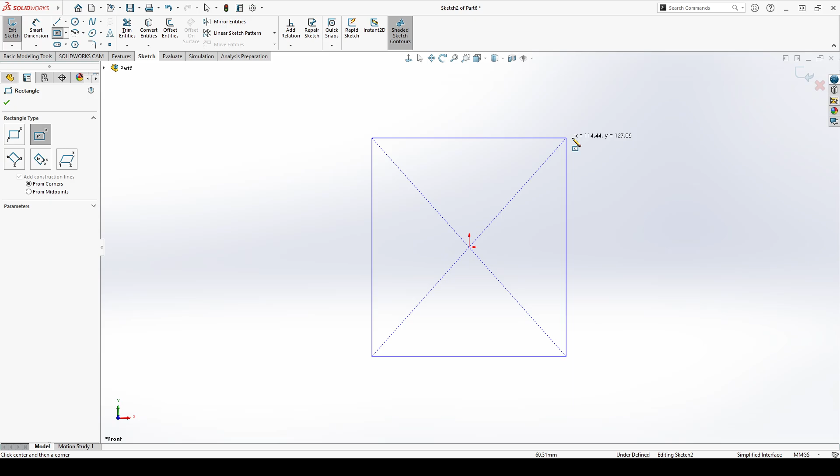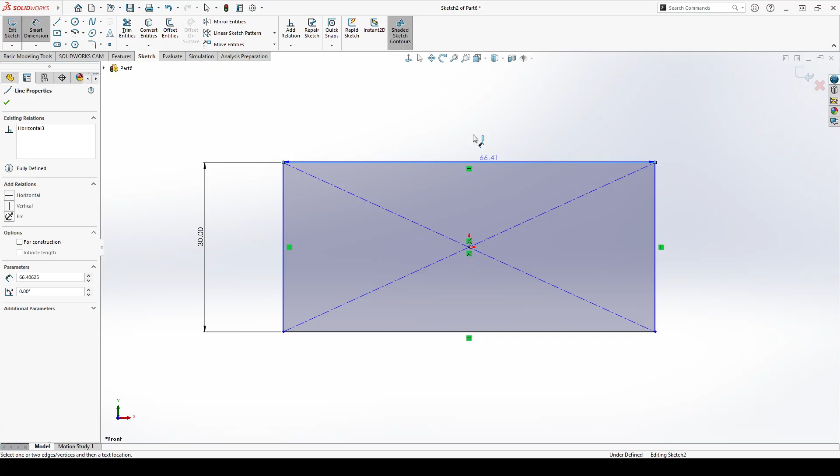We're going to make a rectangle. We can make a center rectangle actually, like so. What happens if we try to make fillets on center rectangles? We can, so we don't have to worry about it later. For now, let's fix the height and the length. That's 30, and this is 60.

That's the base pad. Now let's make these arcs, or sketch fillets on the thing. Let's give it a radius of 8. And there we go.

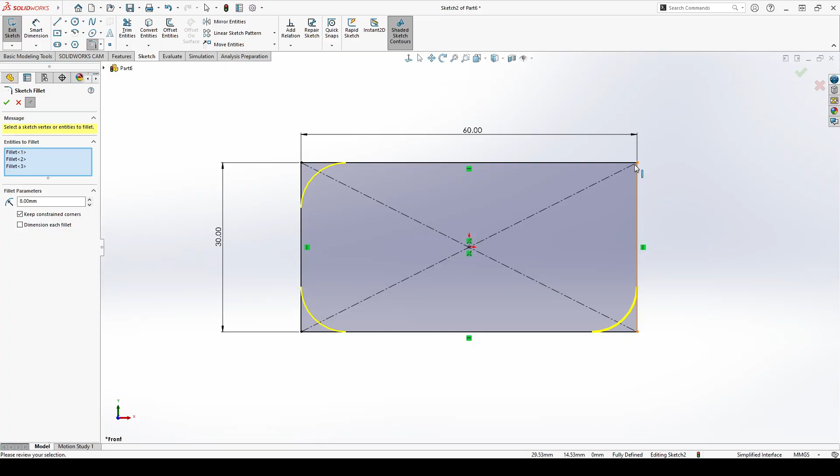Base pad is complete, we just need to pad it out now. So exit the sketch, select it, features, extrude it. It is 5 in thickness. Doesn't matter which direction, so it gives us a thickness of 5 millimeters. There we go.

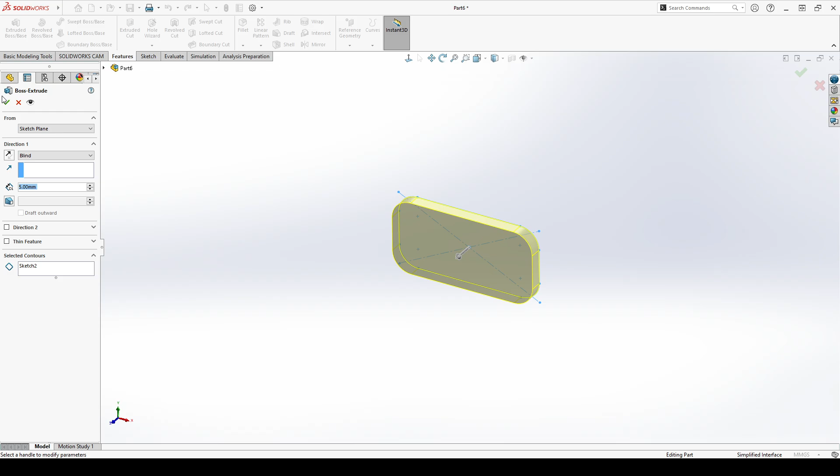So we do need the holes in this pad, so let's make that inside the pad. Once you're done with something like this, you already convert it into a feature. You can just open the sketch and modify it after, don't worry.

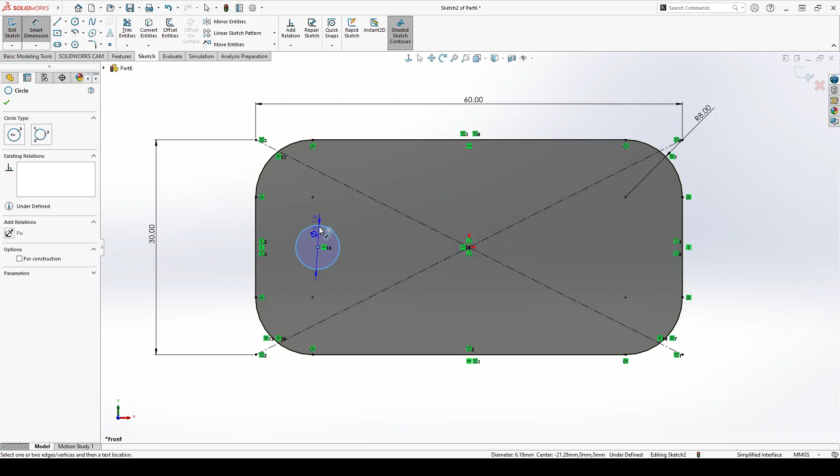So we are going to be working along the axis. Let's make this horizontal - the horizontal is the same thing as making a center line and putting on a center line. So diameter is 8, and the distance between this and the other one is 40, so the center is going to be 20.

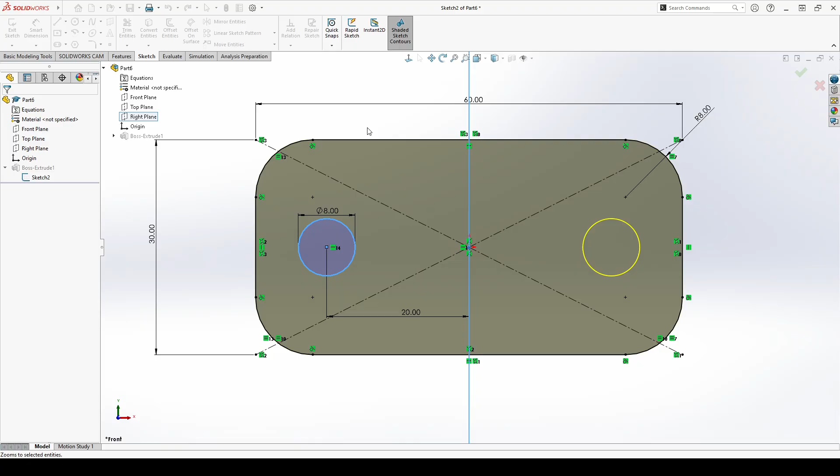Just mirror it off now. So select this and click on mirror entities. About, it's going to be a copy, so about this plane, and it's done. So exit the sketch and it'll be a hole. And there we go, the base pad is complete.

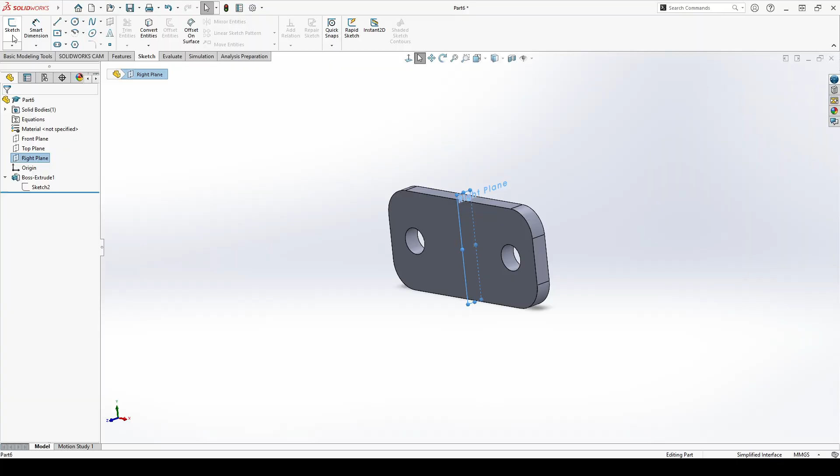Now let's start with the center thing, not the left and right pad thingies. So let's go to the right plane, which is exactly in the middle. Let's sketch here, something like so. Do we need the center lines? Well, not really. So let's go ahead and look carefully at the sketch first.

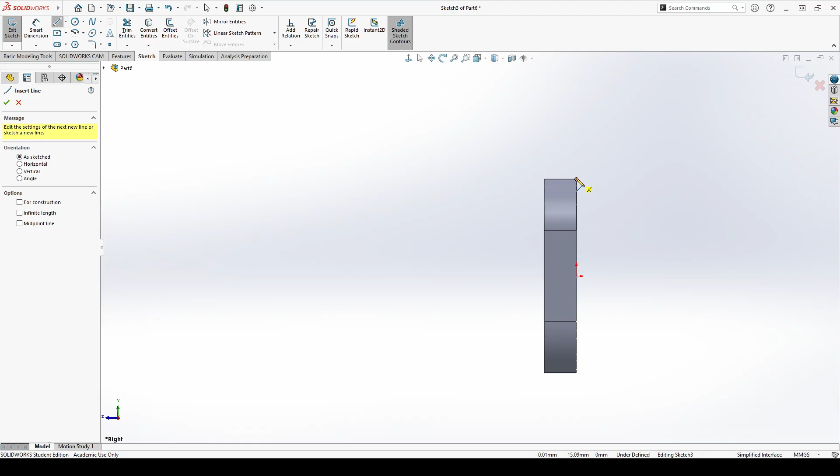I'm looking at the sketch and I can see that the top, I think, is connected to this surface's edge, not this edge, but I could be wrong, I'm not sure. Let's use this edge for now, go about making a straight line, like so. Make another line, like so, and make it parallel to this.

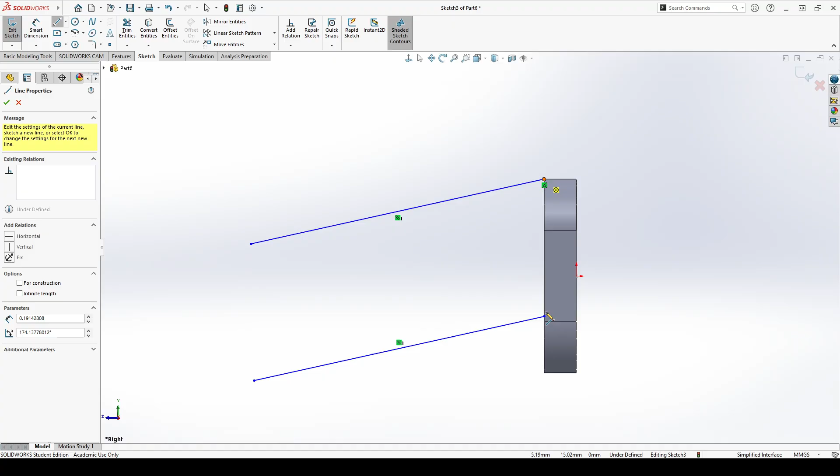This line is connected to that edge, and make it vertical, like so. So now we do need that height, right? Because we can't move it left and right. So what do we do now? We'll verify this after with the answer because I can't tell right now whether that is touching the edge or not. But either way, let's go with the assumption that it's not touching that edge, but it's touching this edge.

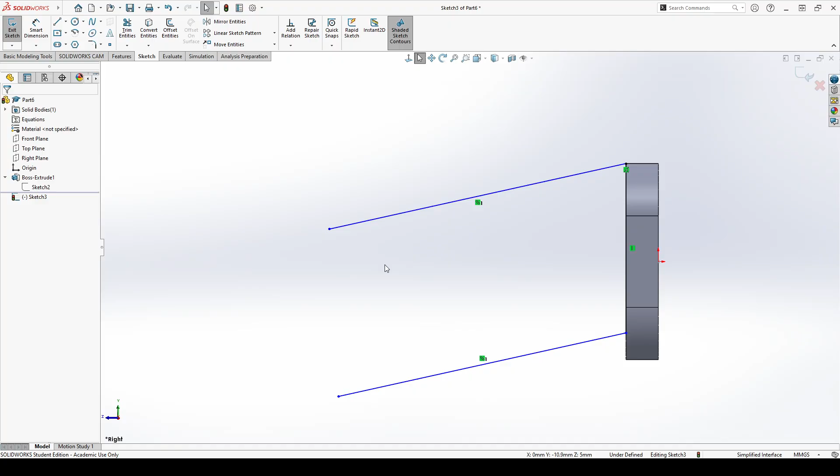So let's make our circle, which is right like that. It's tangent to that, so that's our edge, and this is also here. Wait a second, is it tangent? I don't think it's tangent to this line. Right? Oh, it's because it's parallel.

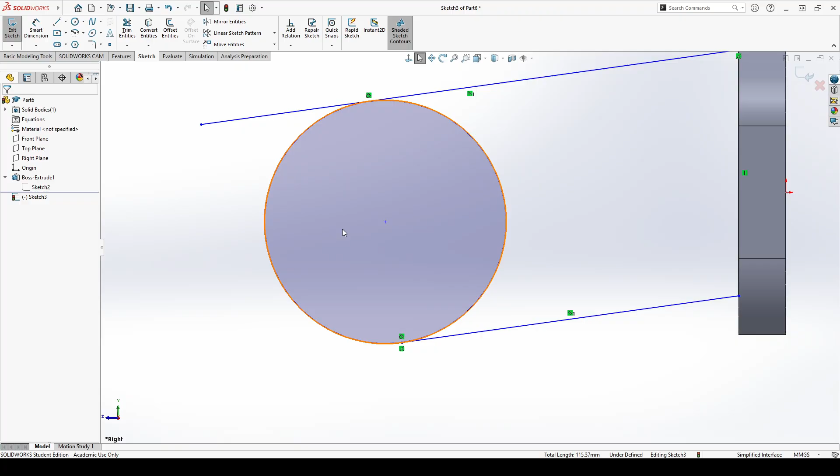Okay, so what happens if we coincide this? Nothing, right? But this is not tangent, so make this tangent. There we go. Okay, so what now? Trim this and the inner part of it, maybe? Yeah, okay, so it's complete.

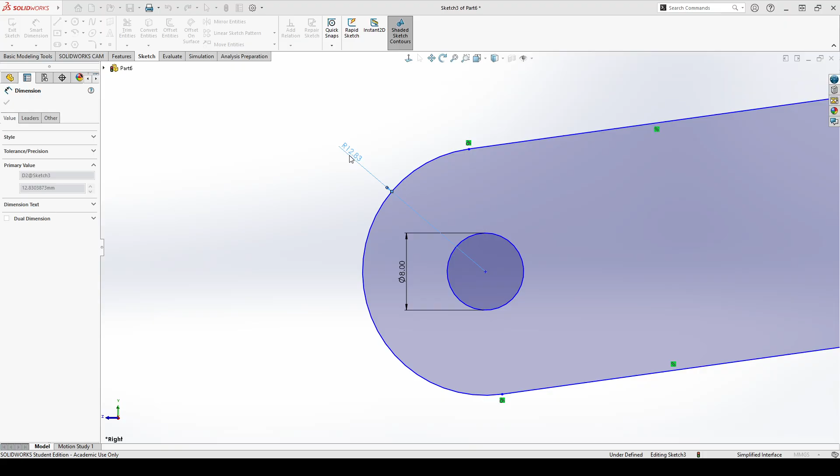And what's next is the little hole in the middle. So that is a diameter of 8, and this is a diameter of 25, so radius is 12.5. Let me just say like that.

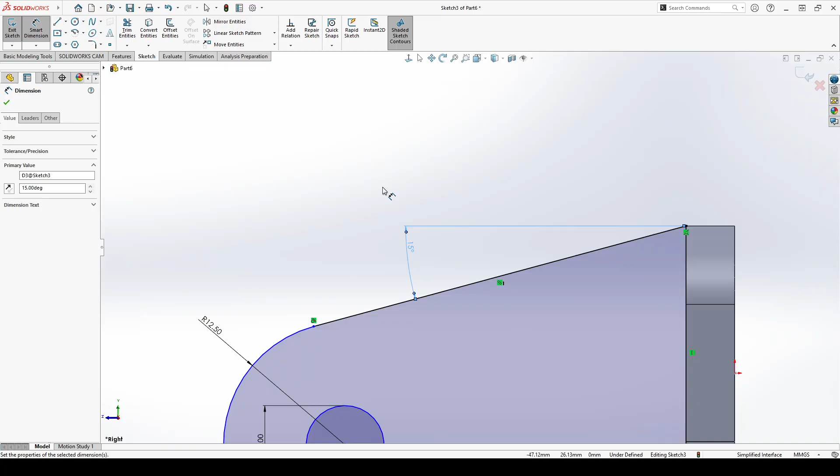Now we do need that angle to the vertical, to the horizontal I mean. So that edge to that edge is going to be 15 degrees. Okay, that's pretty slanted, more slanted than I thought. Okay, what's the next thing that we need? We need that distance from here to the origin, is 40.

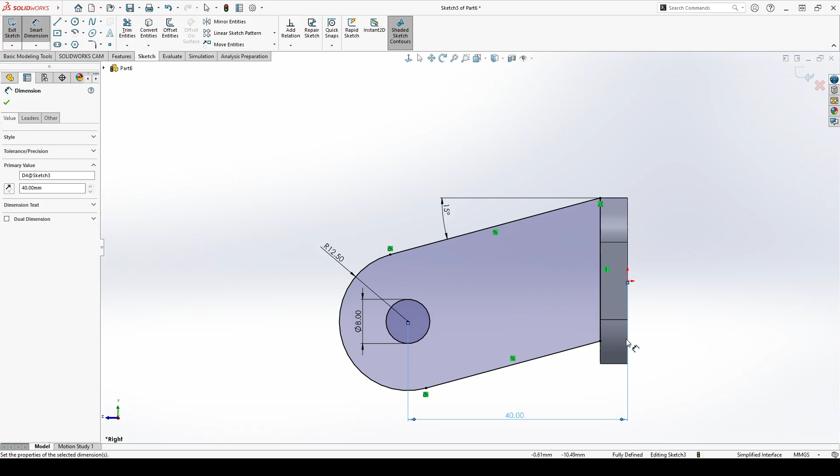Okay, that's done, it's fully defined and it's something like this. So what do we do with this? This is a thickness of 9. Is it 9? Yeah, it is 9. Okay, let's exit the sketch and make this into a pad of 9.

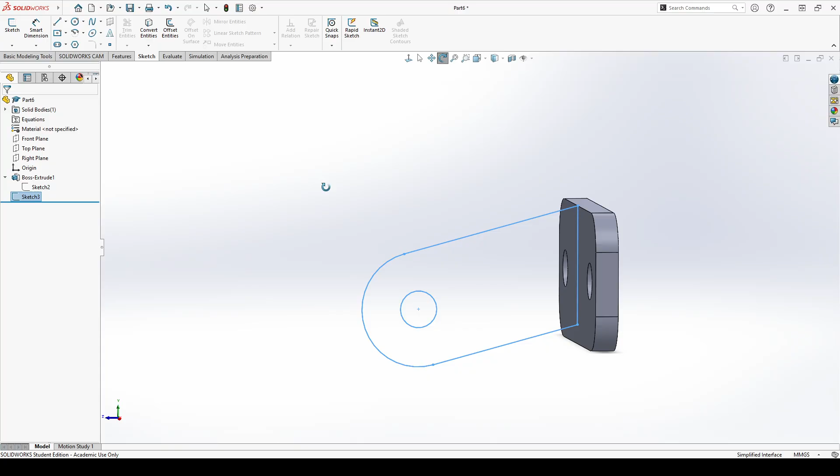Features, extruded cut, pad of midplane of 9. So that's our middle thingy.

Now we're going to make those two side support looking thingies. There are multiple ways of making those curves. So how do we want to do this, we can do it one side or we can do both sides. Well, let's just start in the middle.

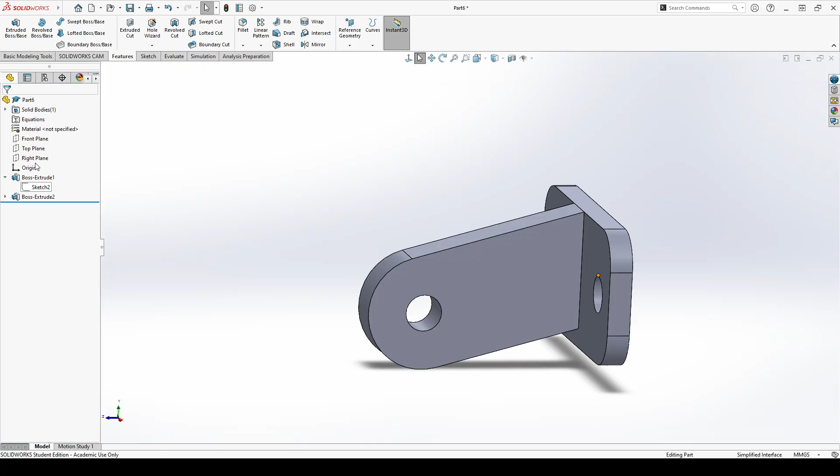So right plane again, this is the middle, so sketch here, and what we can do is make another circle for simplicity's sake. Make a circle, make this and that circle concentric, like that, because they are, according to the sketch, I think. At least that's the assumption I'm making. And then...

Make a vertical from where? From the bottom of this, right? So let's just make a vertical. Coincide this to this flat surface - oops, collinear. And this starts, where does this thingy, the flat thingy start? It starts, well, let's just keep it up here. There we go.

And as for the top part, well, let's convert entities this edge to get it out. Perfect, let's trim it out like so. Trim this out as well. Actually, let's trim the entire thing out for simplicity's sake, so we get something like this. We know that the radius of this is 14. Okay, that fixes the majority of the problem.

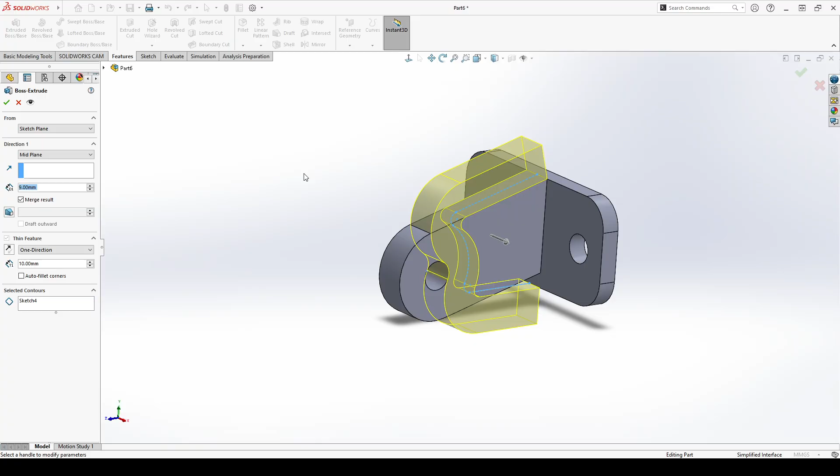Okay, exit the sketch and construct it now into a pad. We convert it into a feature. Let's - why is it choosing? Oh, it's because the sketch is incomplete. Big mistake, let's go back. The sketch isn't closed, that's why it wasn't shaded. So close this out like so. Now it's closed.

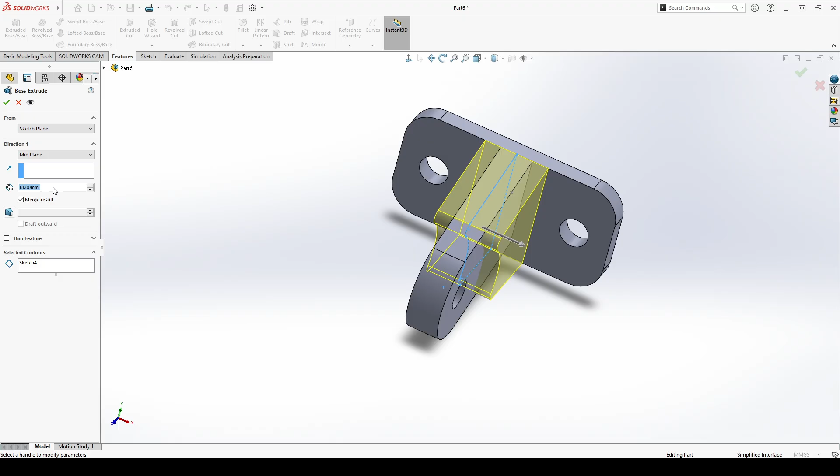Let's go back out and go to extruded base. And this is a thickness of 18 as mid plane. And there we have it, the entirety of this sketch. So it looks like it.

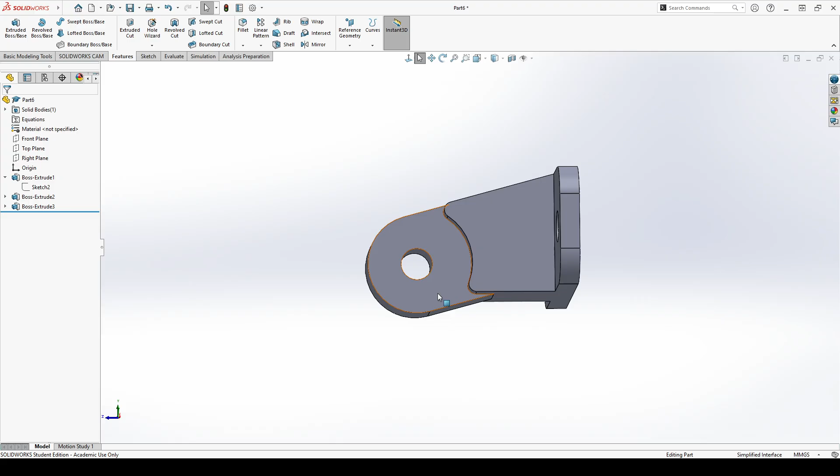So let me just double check a few things here. This lower thing is flat, horizontal. This is curved, it looks like it's tangent, and this looks like it's tangent, that's why it's off by a little. And so is that bottom edge, these edges I mean. And there are two holes here, this is what it looks like, and there's an edge over here.

Okay, let's check - my volume turns out to be 24032. Perfect. Alright, thanks for watching and see you in the next one.